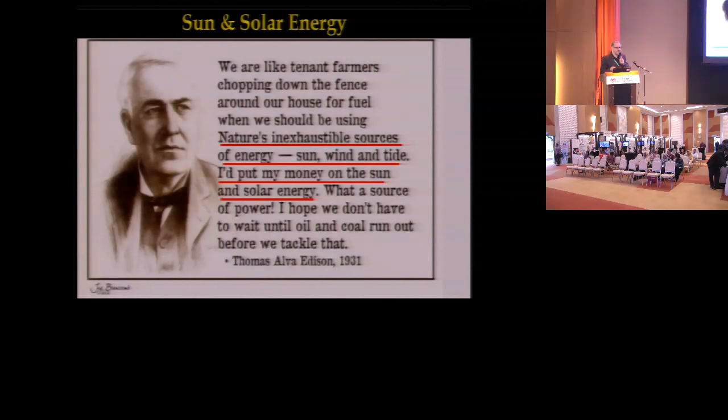I start with this statement by Thomas Edison. Thomas Edison said that we are, as a farmer, looking for fuel near our fence of our farms. But in fact, there is no need because it is available. All the renewable energies are available. And he said that the best that I can invest is the sun, meaning the solar energy. And he is correct. Why I support his statement and I say it is correct? Let me show you this.

What we needed during a year, it's around 16 terawatt per year. And this 16 terawatt per year, if I compare it with the solar and the other resources of energy, it is something like this. So this is the 16, and this is the available energy from solar during the year. And those are the other possible resources of energy in the world. If you look, definitely you can make the decision that solar is the future for the energy production.

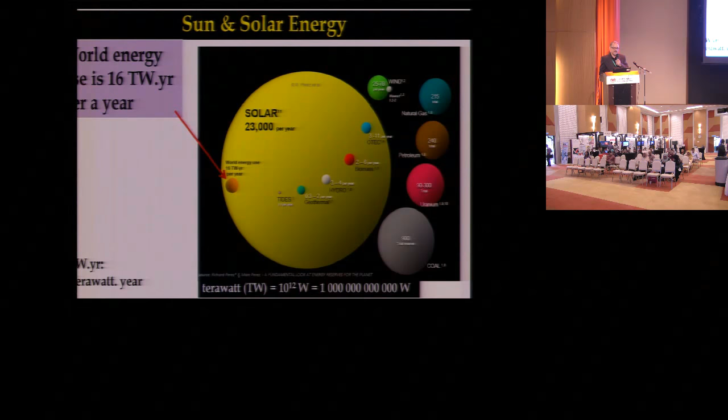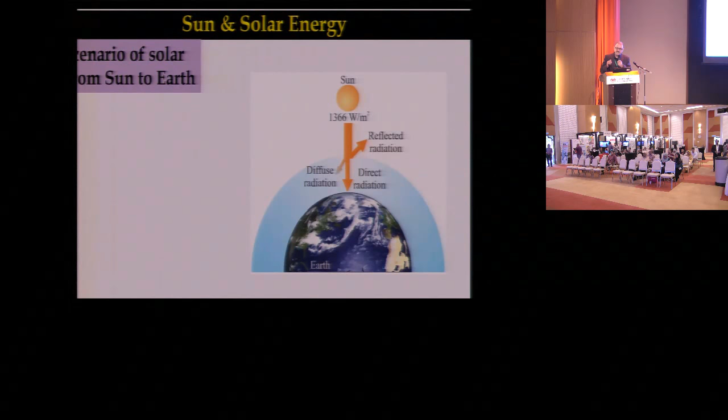However, what is the scenario when we are receiving the solar radiation? How it's come to the earth? I call it the scenario of solar radiation. If this is the sun, then out the atmosphere we are receiving 1366 watt per meter square radiation. When it reaches the atmosphere, some of it reflected back, some of it is diffused, and what we receive, we call it the direct radiation to the earth.

Now, it is something like this. This is the incoming radiation, some of it reflected back due to the dust and the cloud, and what we receive is this portion directly. In this slide, I am going to touch a little bit about the greenhouse and what is the trapping of the thermal energy in the earth. Right.

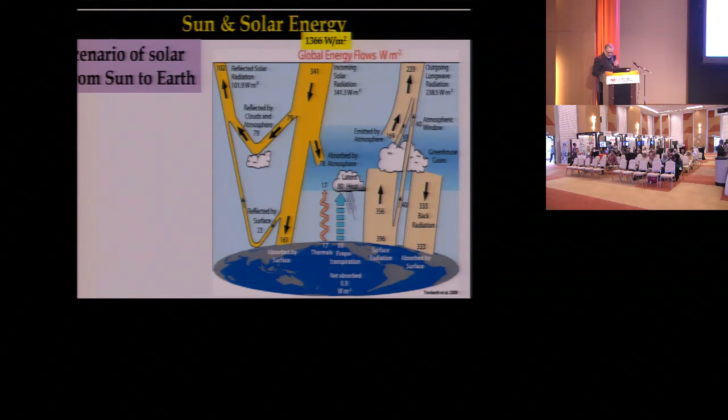Here, if you look, there is thermal activity on the earth from thermal power plants, from evaporation and reflection of solar radiation. And this usually escapes to the environment through the atmosphere to the outer space. Unfortunately, with the presence of the greenhouse or the emission of the CO2, we will have a barrier. This barrier prevents the radiation to escape, and it returns back and is trapped between the cloud of the emission gases and the earth.

And this is alerting issue. We have to look into this seriously in the near future or in the very, very near future. There are many signs of global warming and affecting the climate seriously. However, this is not the subject of my presentation. My presentation subject is how this portion of solar energy can be utilized. We received this one, how we utilize it.

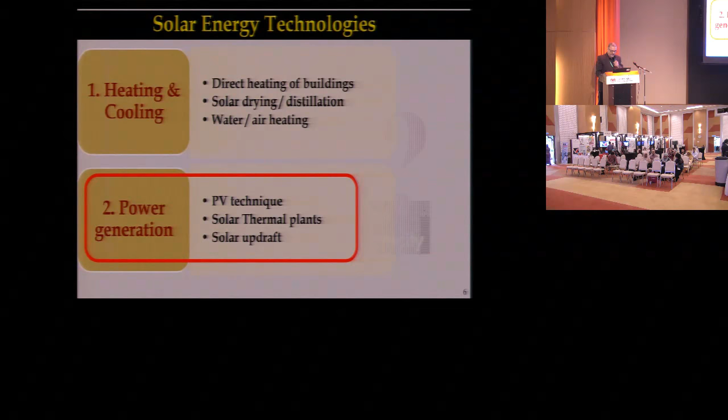And there are many technologies to utilize the solar energy. We are focusing on the power generation by solar energy. There are other technologies or other utilization of the solar, but let us look into these techniques. How solar can be converted to power. There are three techniques to convert the solar to power.

The first one is the PV, and all of you are aware what is the PV. And the PV is conversion of light into electricity using semiconducting material that are possessing photovoltaic effect. And the most application of this phenomena is in the solar PV. So the PV panel converts the solar radiation into electricity through chemical reactions in the material of the PV. Right.

I present some of our effort on the PV utilization, and we have established a UTP 10 kilowatt system to generate electricity. What is the uniqueness of this 10 kilowatt system? It is different than what is available or what has been established by PV panels to generate electricity.

First, we have a good bank of batteries which secures 24/7 generation of electricity. In case there is no sun, there is a cloud, then the battery storage is enough to maintain the supply of the power.

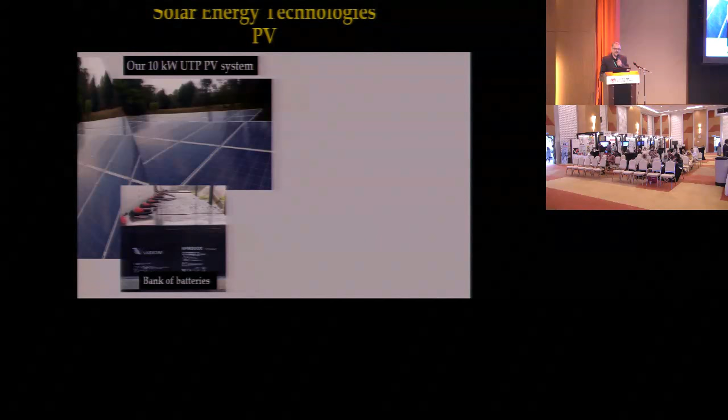Second, it is connected to the internet through the MYREN network, and any user in the world can get a password from us. He can enter the system and he can monitor all the parameters in the site. So we utilize MYREN and, through a UTP server, we upload the information through this system.

And the other issue is that we are generating 24 volt and we generate 48 volt to integrate with other systems. Then I can conclude that the uniqueness of our 10 kilowatt PV system is a 24/7 power supply, two different outputs, and remote monitoring through the internet using the MYREN network,

and it is globally accessible for real-time data sharing. Anyone in the world just gets the password from us. He can monitor the temperature, the solar radiation, the power production, and so many parameters in our solar site. This is about the PV.

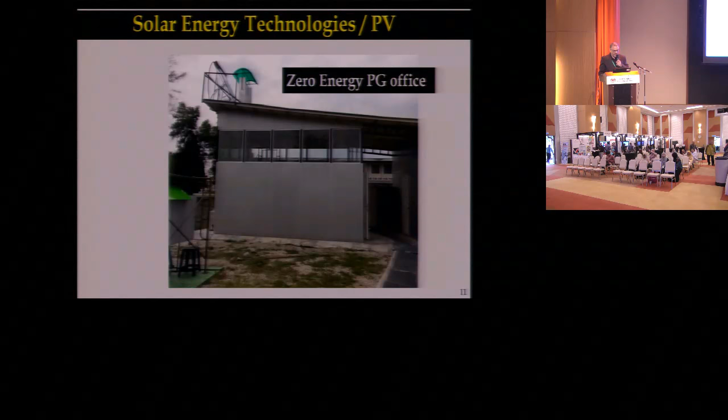The next technology: where we used this 10 kilowatt PV, we are operating our zero energy postgraduate office. This is a postgraduate office in the site, and we utilize the 10 kilowatt generated by the system to operate it, and we are using an environmentally friendly air conditioning system called a solar assisted air conditioner.

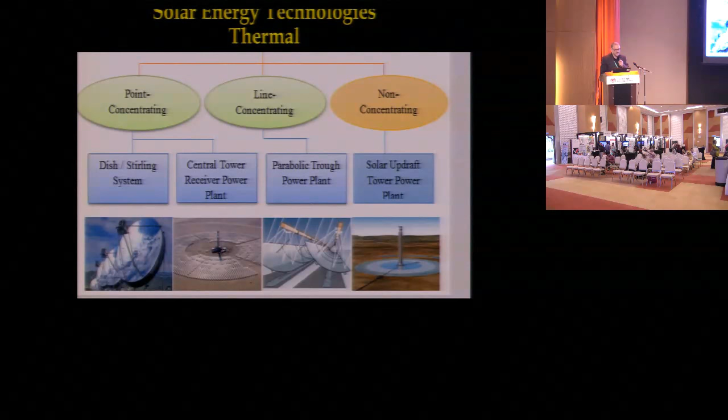We come to the thermal. Solar thermal can be split into three different categories: point concentrating, line concentrating, and non-concentrating, or updraft systems. I go a little bit through each one and what we have done for each technique in our system. Right.

First, I start with solar updraft power plants, which now represent a revolution in the world, and many countries like the US, Spain, Australia are moving toward this technology. They are investing in this technology. Updraft power plants can be split into two types: solar chimney power plants and solar vortex engines. What each one represents, how it works.

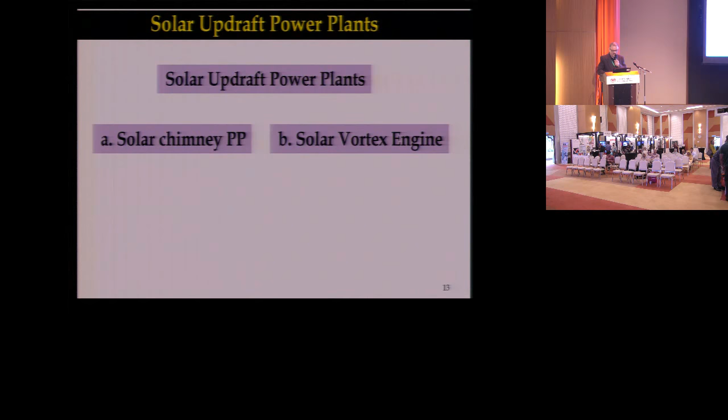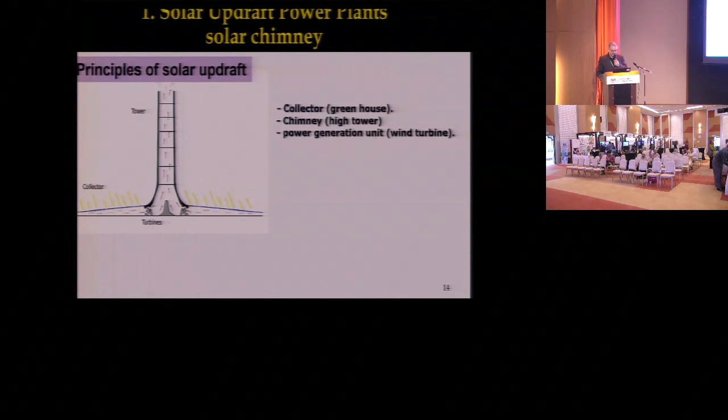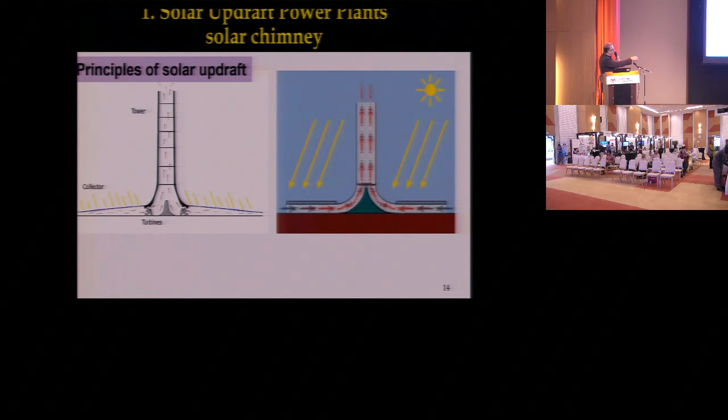The principle of solar updraft is that solar radiation penetrates through a transparent canopy, hits the ground, and you will have a stream of air. The stream of air goes through a tower, and there are wind rotors to generate electricity. It is something like this, the continuation of the process: you have an air stream and you have a turbine to generate electricity, which can be standalone or network connected.

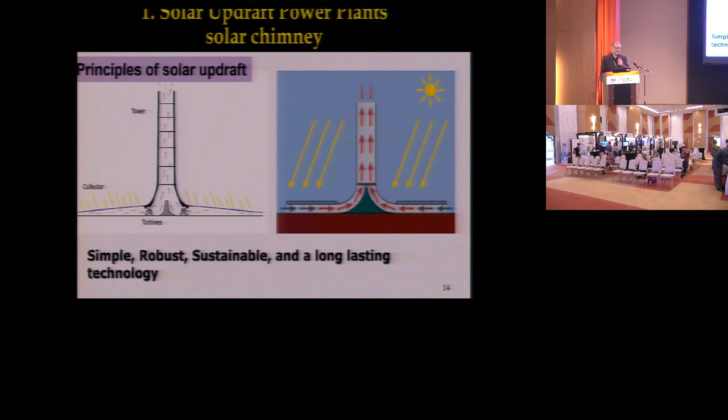It is a very simple, robust, sustainable, and long-lasting technology with low-tech, no need for high-tech. And this movie can show us the principle of operation of the solar chimney power plant.

Yeah. The ground is heated, and you will have heat transfer from the ground to the adjacent particles of air. A stream of air is created inside the collector, and you will have airflow. The airflow operates the wind rotor, and the wind rotor is connected to a generator to generate electricity.

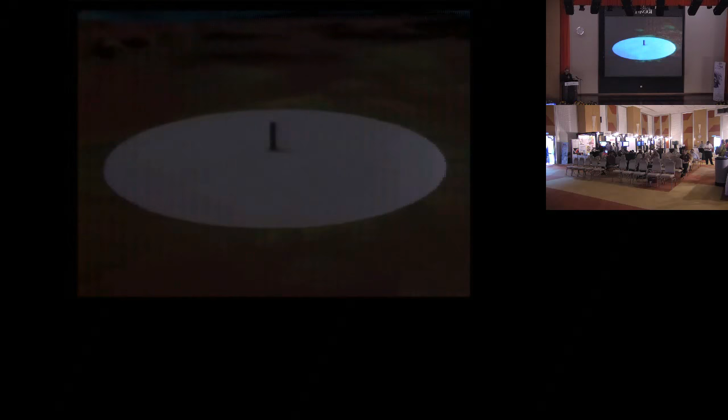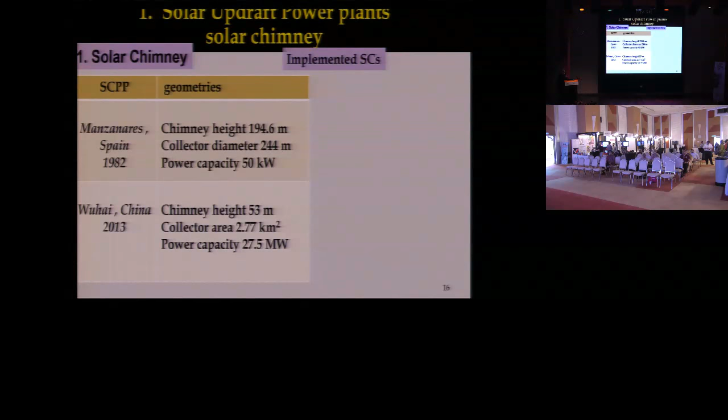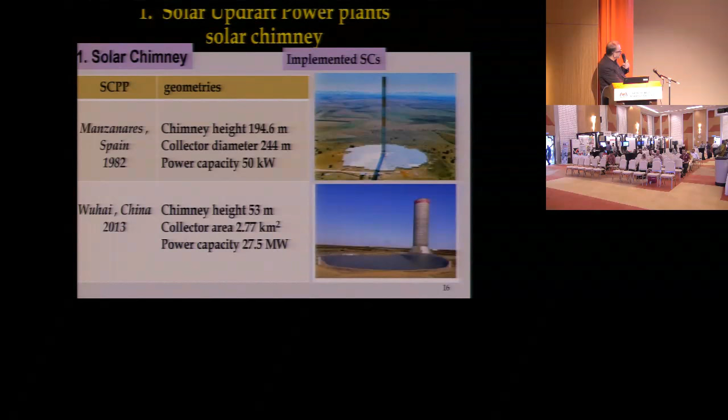So far, two prototypes have been implemented in the world, one in Spain and the second in China. This one in Spain was built by the German Ministry of Science, and this one is in China, and the characteristics of each one are represented here. Many other projects are under construction. These are some of them.

And if you look here at the height of the chimney, now they are talking about 1 kilometer height to get feasible production of electricity. There is one in Australia, a second one in Spain, and in Namibia, and in the USA there are 3 or 4 projects in Arizona and California. However, most of the investment or cost goes to the chimney construction. And this is what we are thinking about, replacement of the solar chimney or tower by another technology, and I will come to this.

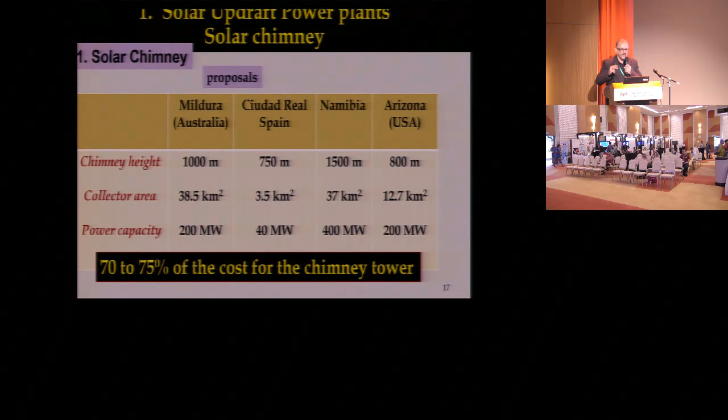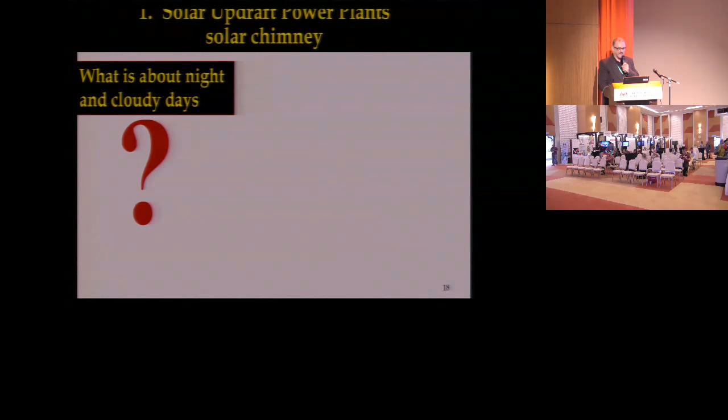Now, what about the night and cloudy days? In the night and cloudy days, there is no solar. What can we do? We have tested two techniques in our solar site, and we proved that both of them are applicable. We use thermal energy storage, very simple, and we use integration with an external heat source.

As you see here, we used matte black painted pebbles. We found that these pebbles absorb the solar radiation and store the thermal energy, and after sunset, release back the thermal energy, and there is continuation of the production of electricity. So we proved that it is workable, and I can show you that the system can operate

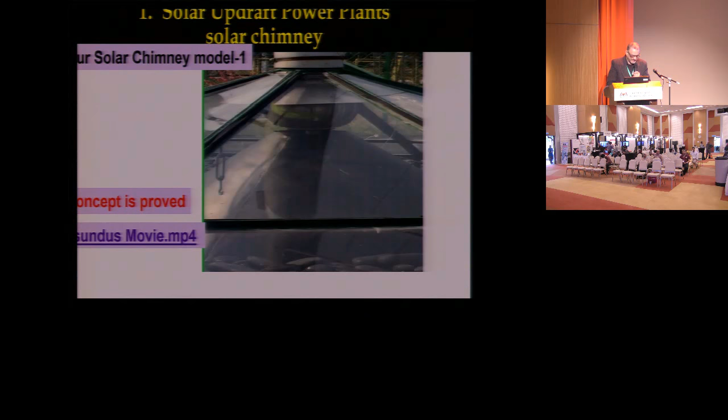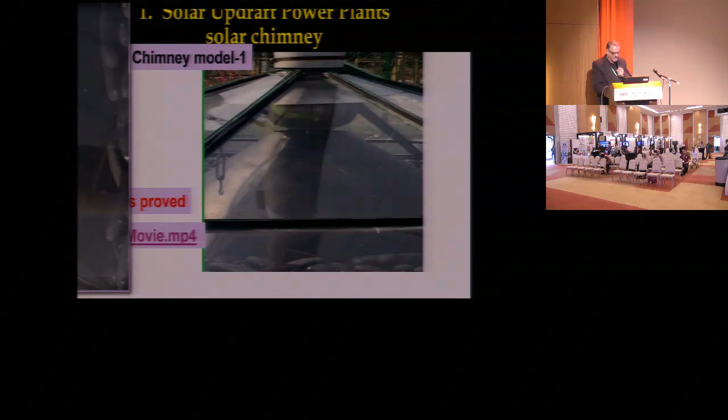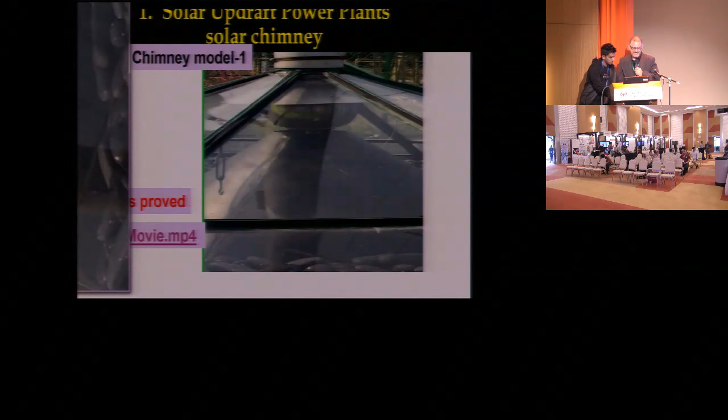by this movie. Unfortunately, it is turned by 90 degrees. So you see that the turbine is rotating. Where is it? I can't see. Yes.

So we generate electricity, a small amount of electricity, and the idea is to prove the concept. The concept is applicable in Malaysia.

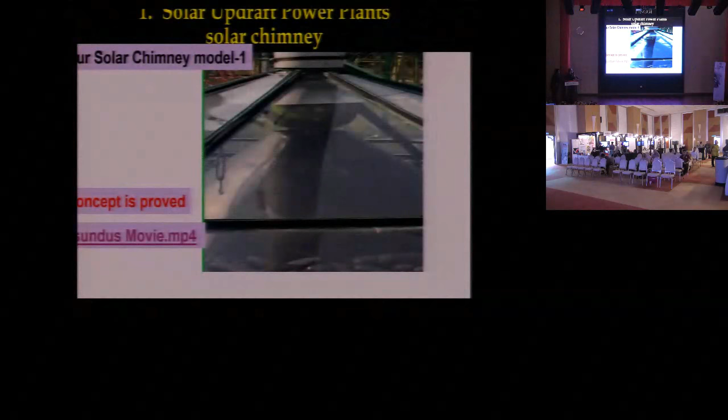We tested another technology to integrate the external thermal source with the solar. So the idea here is that we inject hot gases underneath the collector. During the day, in the presence of solar energy, the absorber absorbs the radiation and generates the wind stream to operate the turbine. In the night, the flue gas transfers heat to the absorber and again generates an air stream to operate the system.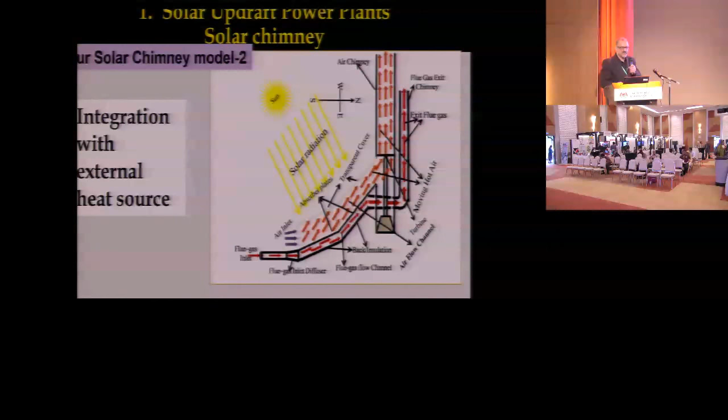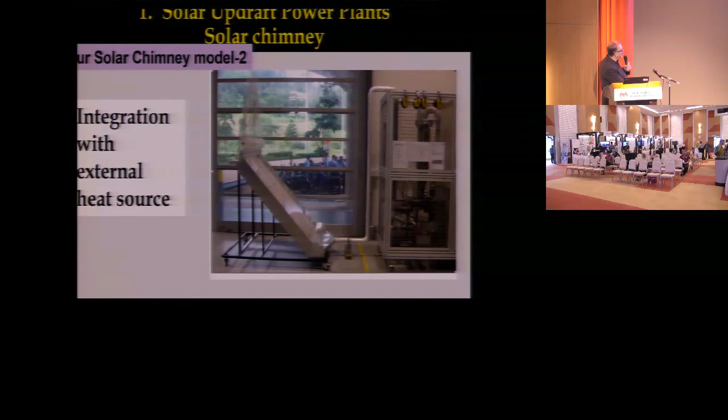So here, we successfully proved this by this experimental work. We utilized a domestic gas turbine, and we utilized the flue gas from the turbine, and we operated our system in the lab. Then we went out to the site, we tested the system, and we found it operates beautifully. So by this, we generated electricity 24/7.

The other technique that we are utilizing: the solar chimney power plant, which we have in our site, and we designed a flue channel. We inject the flue gas through the channels, and those channels exchange heat with the air. In addition, the exhaust we injected again in the tower to reduce the pressure and increase the temperature, so we will have a higher stack effect. So the system has been proven very successful, and can generate power 24/7. We proved this by experimental work and numerical work.

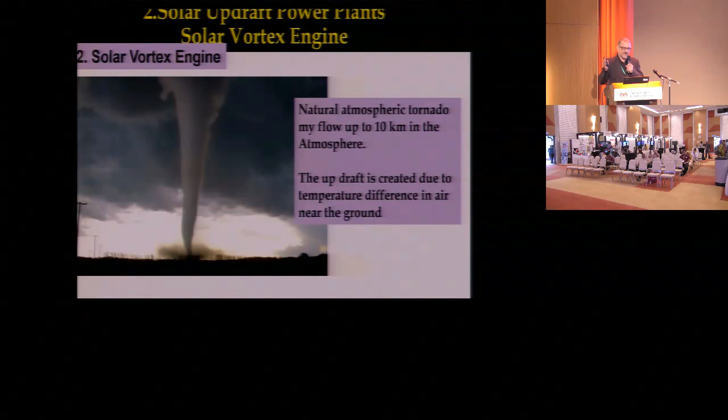I come to the second technique of the updraft. We name it the solar vortex engine. What is the solar vortex engine? This is a natural tornado. This is what happens in the environment or in the atmosphere. The tornado, when it is created, can go up to 10 to 12 kilometers in the atmosphere. So we thought, why are we not utilizing this phenomenon and bringing it to the solar chimney? Instead of the tower, let us use this natural phenomenon.

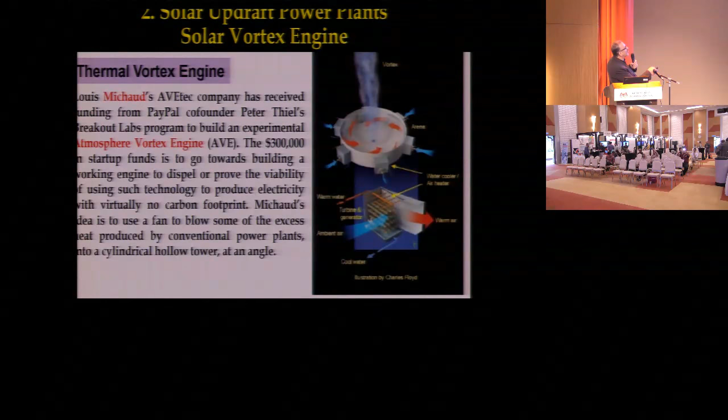And the technique was started by Louis Michaud. He is an engineer, and he got a good research fund. He suggested using a heat exchanger with a plant to generate steam and exchange the heat with the air, and create an artificial vortex. This artificial vortex goes up in the environment to replace the tower. This is the experiment by Michaud.

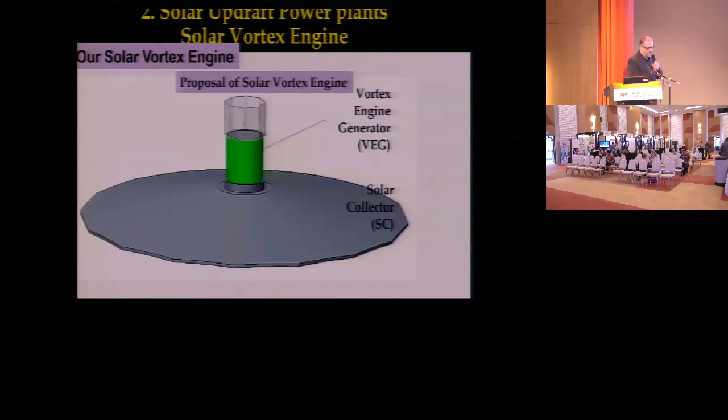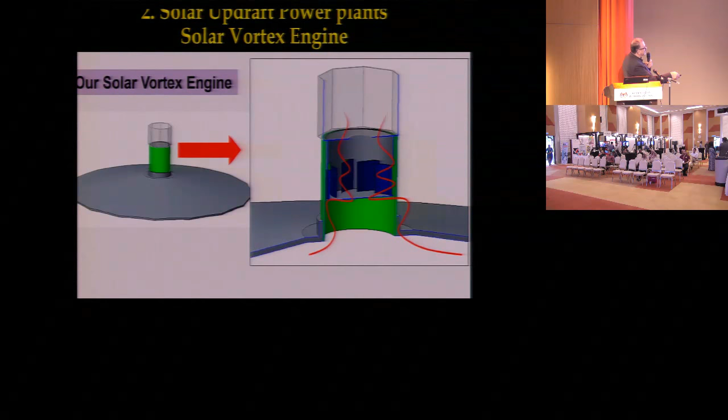What we did, in fact, we proposed: why don't we mix the solar chimney and the atmospheric vortex engine? So we invented a new technique: this is a vortex generator engine, and this is the solar collector. We established this solar collector in our site so that the air is heated up under the collector and goes up into this very simple engine and generates the vortex.

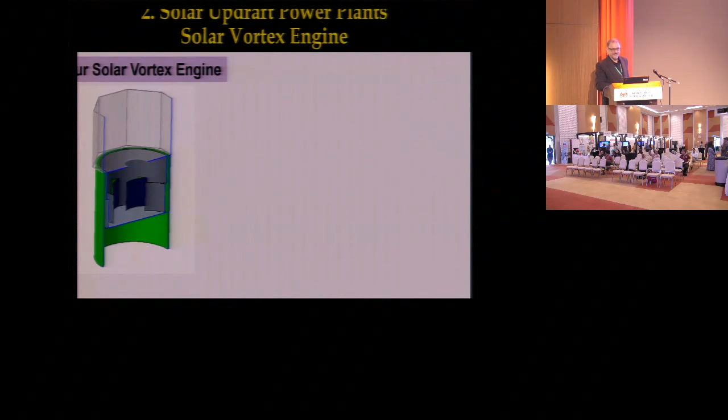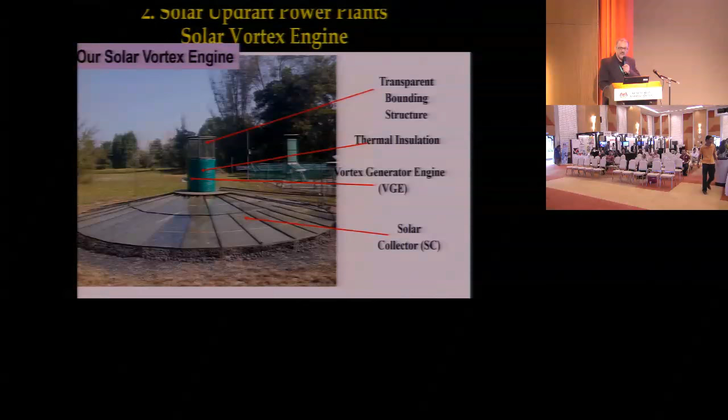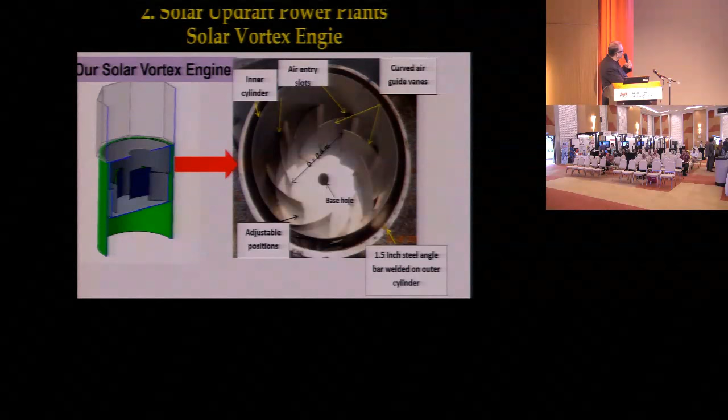Okay. We implemented this experimental prototype, we tested this prototype in our site, and we successfully generated electricity. This is the shape of the engine, and the air enters this annulus from underneath the collector and generates the vortex. I can show you a video here.

Again, Diva, I think I need you. Diva.

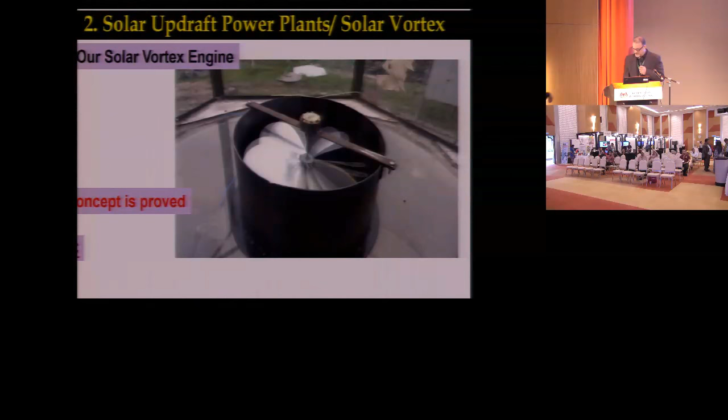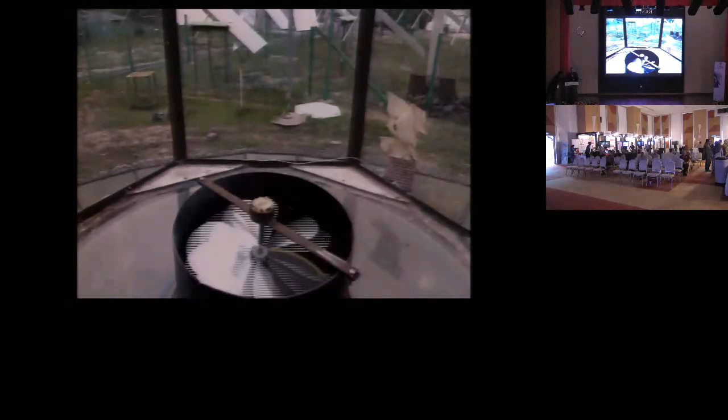Yes. Successfully, we have this wind turbine, which has been designed by Mr. Ali there, and he connected the turbine to the generator, and as you see here, it is running at high speed, which means that the technique has been proven. Okay.

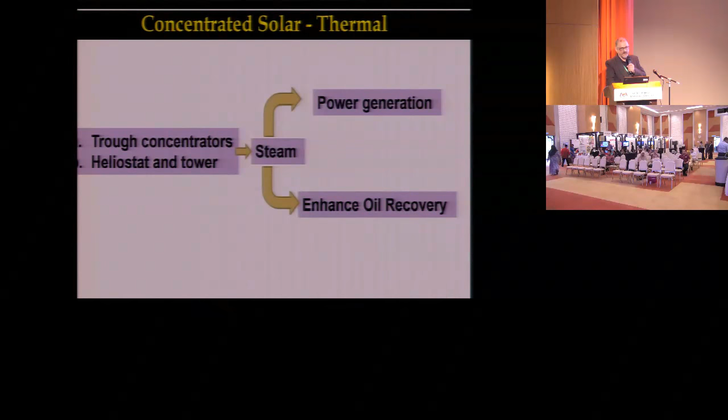What's next? We come to the other type of thermal technologies for solar power generation, which are called trough concentrators and heliostat and tower concentrators. Using those two techniques in UTP, we intend to generate power and to utilize the steam generated for enhanced oil recovery. We have established a concentrator plant. We have Mr. Sinan, who is sitting there. He is working on this trough concentrator, and he is in the process of completing his equipment. And we have another set of heliostat and tower, and we successfully generated superheated steam in this evacuated tube. This superheated steam can be connected to a steam turbine or utilized in the oil field for enhanced oil recovery.

With that, I come to the conclusion from our effort on solar technologies: solar is the largest source of energy to the earth, so it is time to think seriously about utilizing this big source of energy. Second, updraft solar technology is clean, cheap, robust, and a very promising solution to generate clean or green power. And about Malaysia, solar steam generation by solar concentration technology has potential in Malaysia, and we have proven this in our site, and this can be utilized for power generation or for enhanced oil recovery technologies. With this, I close my presentation and thank you for your attention.